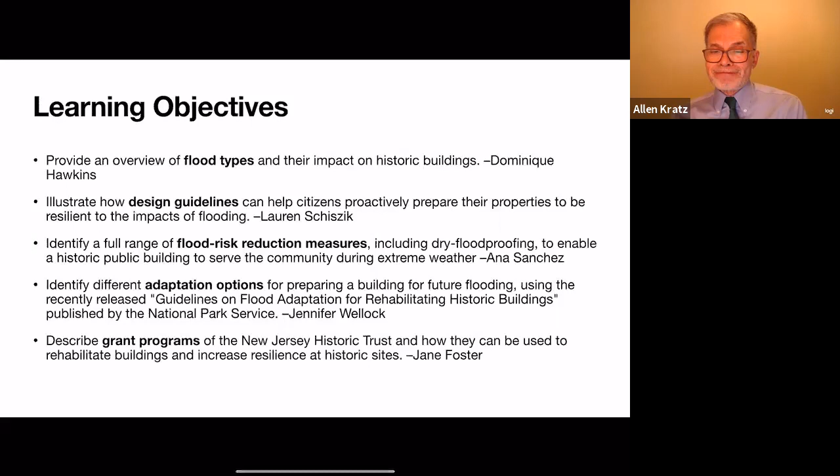Well, thank you. Doing an overview of flooding in 20 minutes or less is hard, so I'm just going to start talking. Next, please.

So historic cities, as I said, are located on water. This is the city of New Orleans. These are all the historic districts, representing over 47,000 properties in all of those shaded boxes. And that's the Mississippi River running through the city.

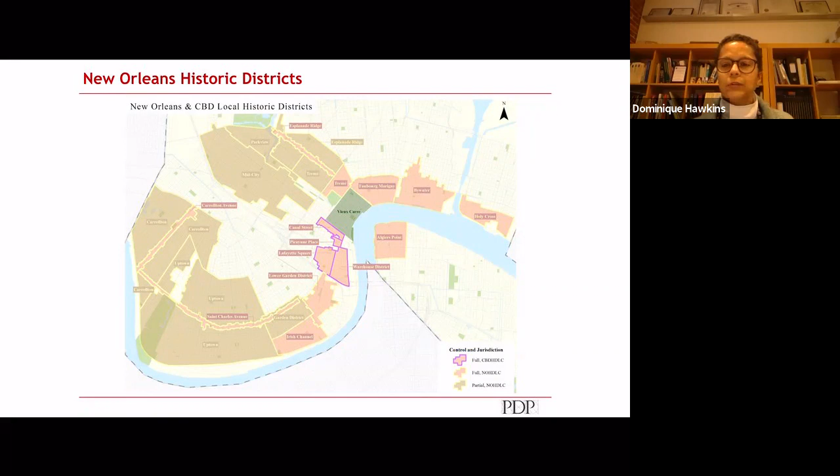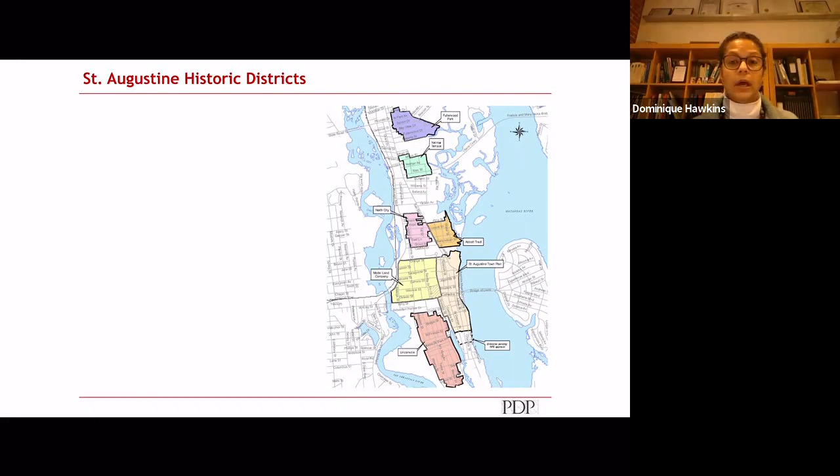This is St. Augustine, Florida, which has been recently hit by a few hurricanes. I'm currently working in St. Augustine on a flood mitigation project there for their historic districts. As you can see, they are literally surrounded by water.

Historic communities inland also face challenges. This is Exeter, New Hampshire. I took this photograph in 2016. By 2020, to manage the problems associated with water, they modified the waterway that ran through town.

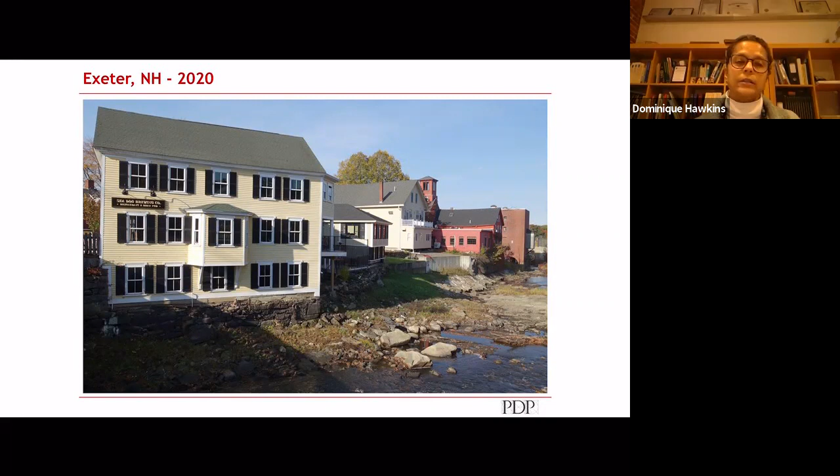Many of our associations with flooding are coastal, and these are the events that usually get the most attention—hurricanes coming into town, which also has an impact of wind.

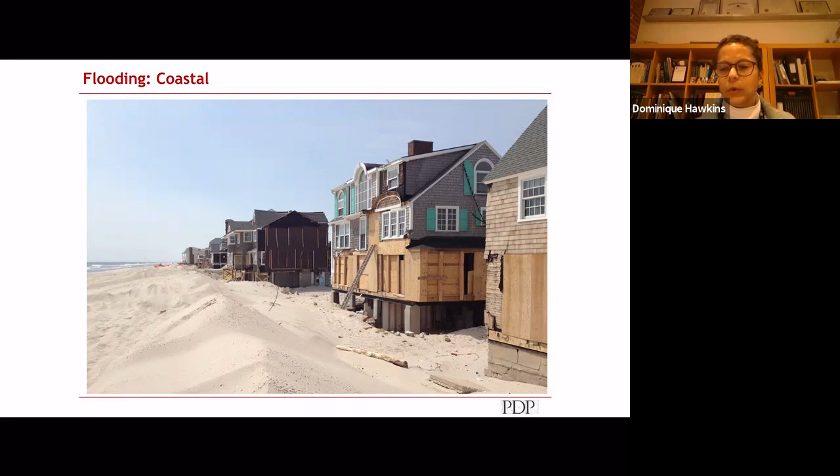But many people deal with flooding literally on a daily basis. Something called nuisance flooding or persistent flooding is when you have the high tides, the king tides associated with full moons.

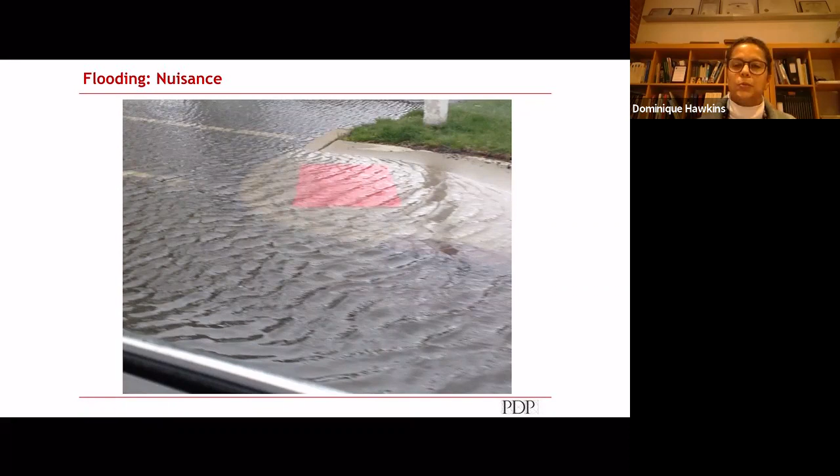People are dealing with water and having to adapt themselves to the fact that water is infiltrating their neighborhoods. In part, this is due to climate change, sea level rise, and subsidence, the lowering of the ground. When you take a high tide and add a major storm on top of it, you can get catastrophic events similar to Superstorm Sandy.

Flooding can actually occur from other sources. Ice can back up under a bridge overpass and cause flooding upstream. It's not just ice, it can also be debris. If you have a lot of debris in a river and a bridge with a lot of abutments or buttresses, that can hold back the debris and cause flooding behind it.

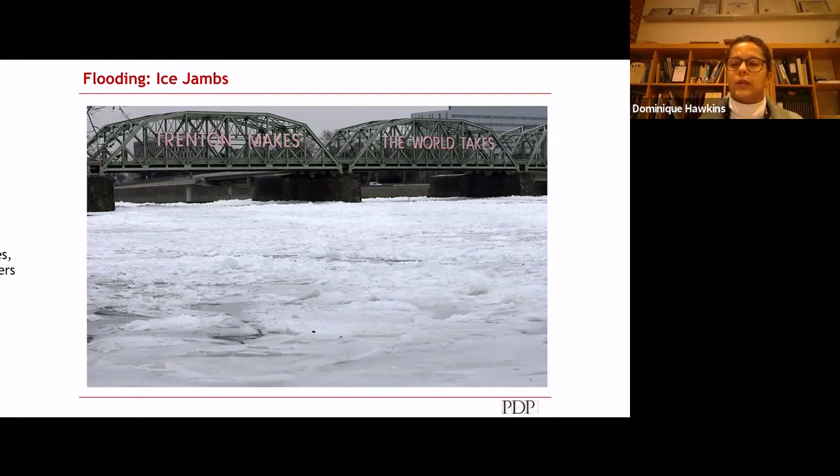You can also get inland flooding. A lake can fill up and cause flooding around its coast.

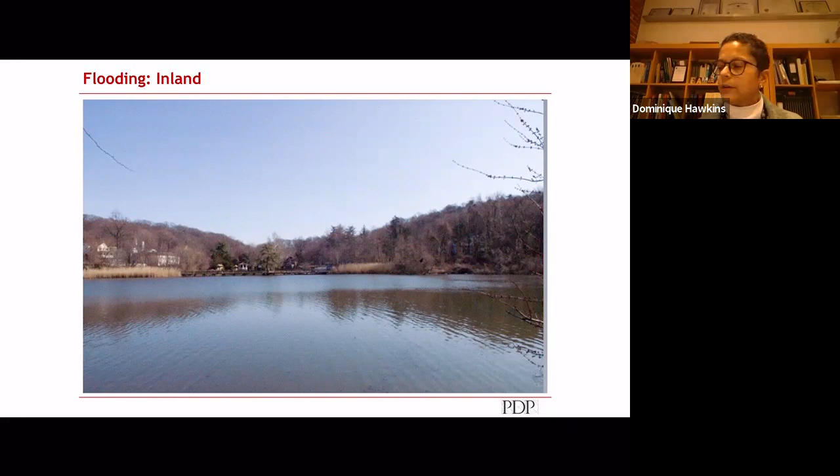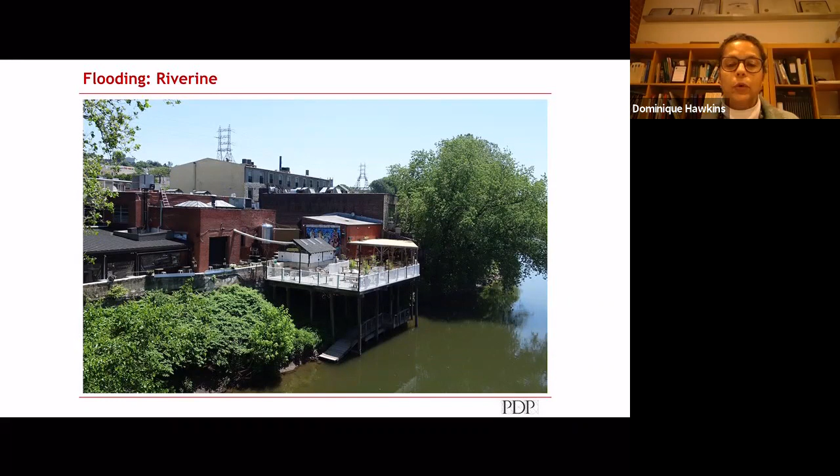Riverine flooding is where rivers rise. This is actually half a block from my office—the Manayunk Historic District, and I wrote a flood guide for the city of Philadelphia addressing riverine flooding. Take a look at that deck, off the back of a building that has been converted—a former mill building converted to a restaurant.

That's a flood. So this was—and look at that sunny sky. I literally sat at my desk and watched the gauges on the river, and I said, it's time for me to take another walk. And I went and took that photograph.

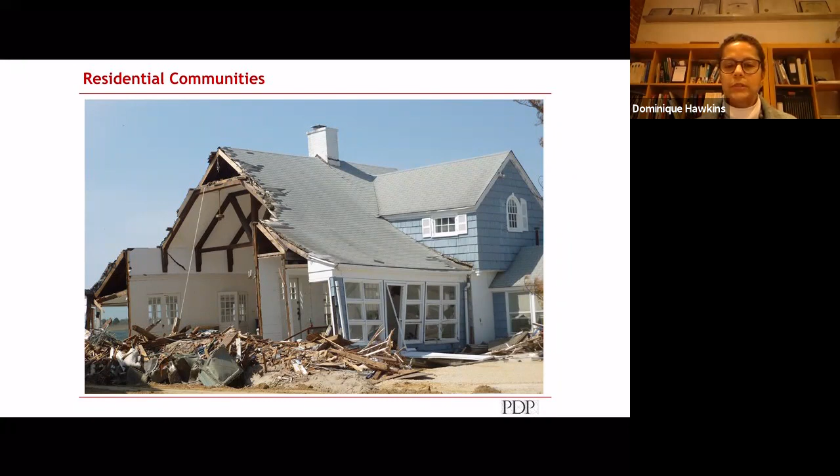Flooding can have catastrophic effects, particularly when mixed with storms. This is a result of Superstorm Sandy. As is this.

This is again back in Manayunk. It's also affecting commercial properties and small homes.

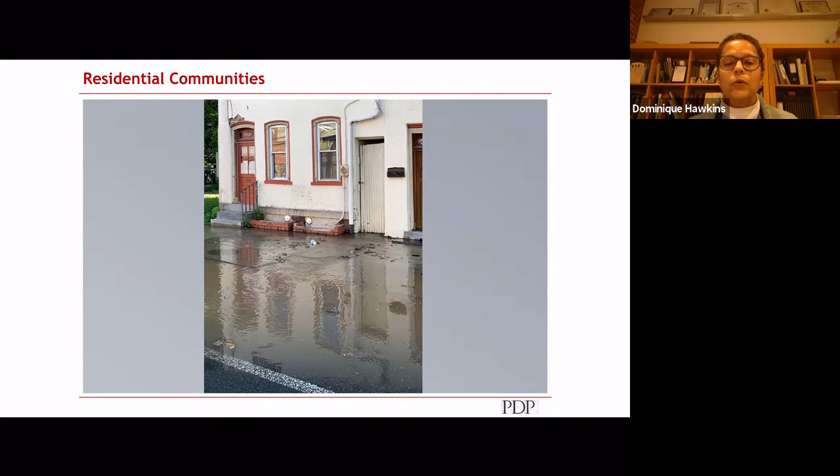Again, just that nuisance flooding—those high water signs are things that a lot of communities just have handy, because it's often a thing communities are dealing with, including places like Baltimore. This is Annapolis.

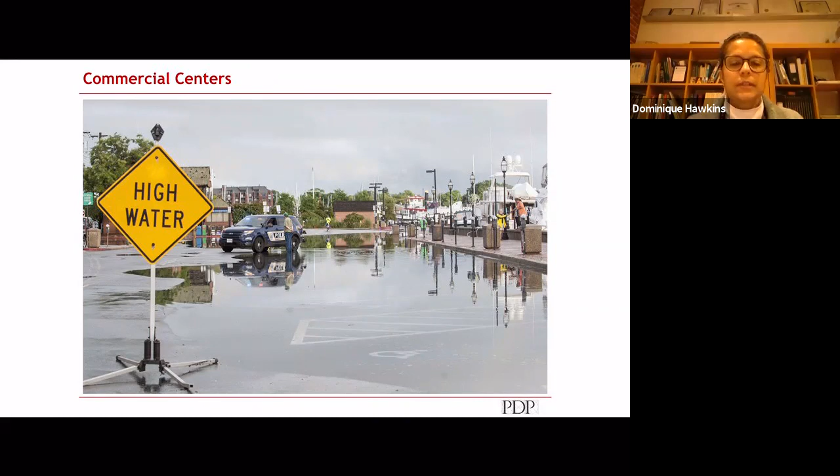In 2016 and 2018, there were two 1,000-year floods in Ellicott City, which ripped through their main street. Not only did it devastate Main Street, but it also caused loss of life. The term '1,000-year storm' means that based upon the historic record of past storm events, it was a storm of such intensity that it would be anticipated to happen only once every 1,000 years. They had two of these in two years in a row, and this is riverine flooding—a rising river.

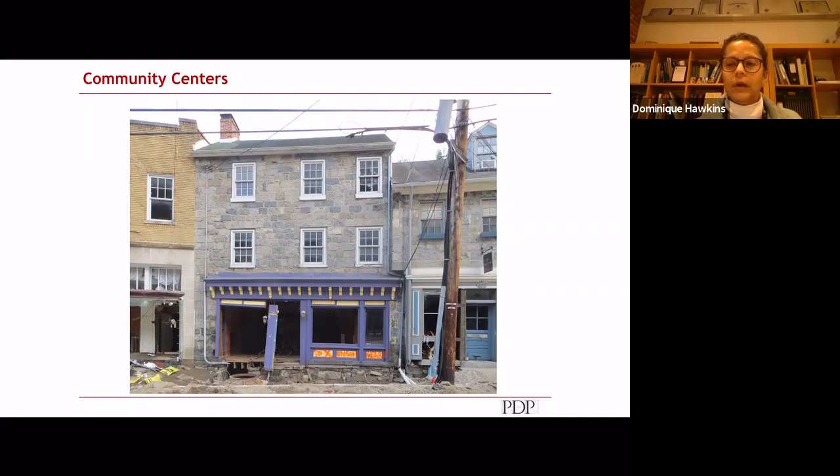It devastated downtown and caused huge economic upset in the town. It also resulted in clear destruction of buildings, and some hard choices about how to move forward.

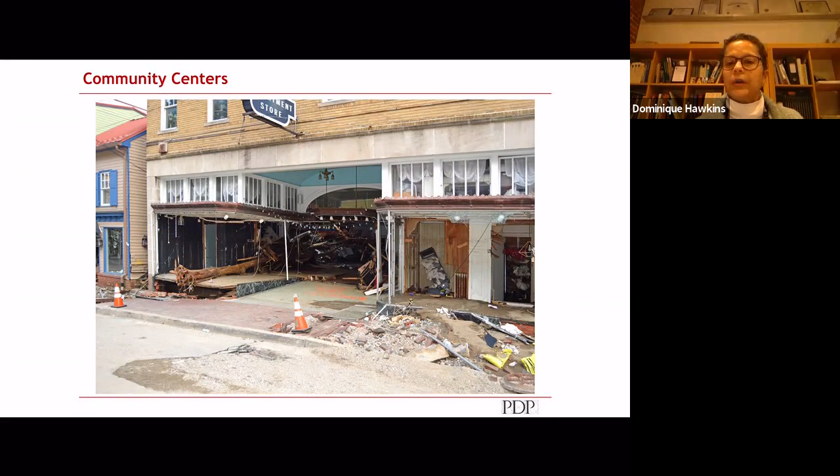One of the things that gets lost in terms of flooding is, particularly on the East Coast and along the shorelines, we think of flooding as a coastal problem. Flooding is actually a pervasive problem across this country.

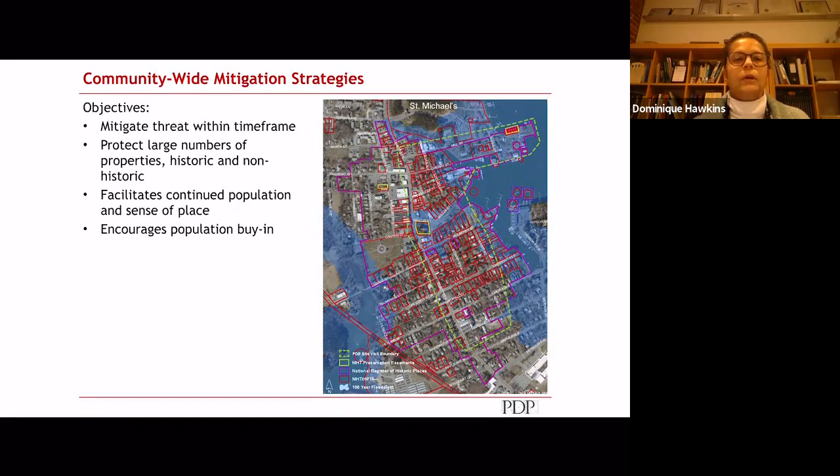Community-wide mitigation strategies fall into 5 categories. One of the most popular is shoreline and bank protection - basically something that keeps the water away at a defined shoreline. Stormwater systems are also a threat - if you can't get the stormwater off the streets or away from properties quick enough, that presents a threat. Community utilities and infrastructure are extraordinarily vulnerable to flooding, and if they are not well placed in a community, it can cause problems. If you physically can't get there, and your bridges or roads are inundated under water changes, that becomes an issue. There are also policy changes you can make to improve your flood resilience.

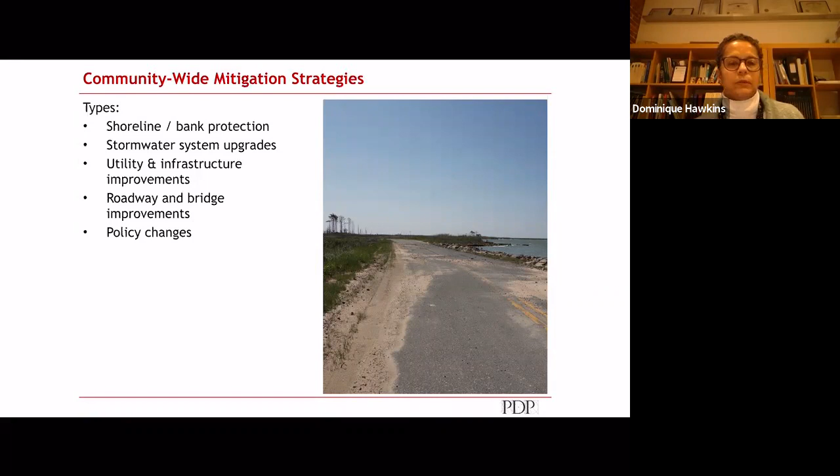Shoreline protection comes in two overall forms: structural versions and natural versions. The current thinking is natural versions are generally better, but I'll run through the variations of these.

Structural shoreline protection along the shore basically creates some sort of physical constructed barrier to keep the water away. You can do it along rivers, coasts, or bays, but it's usually some form of concrete or big heavy stones designed to physically keep the water away. When you go offshore, what you're really trying to do is break up the waves or the force of the water as it moves towards the shore - that's what breakwaters and jetties are.

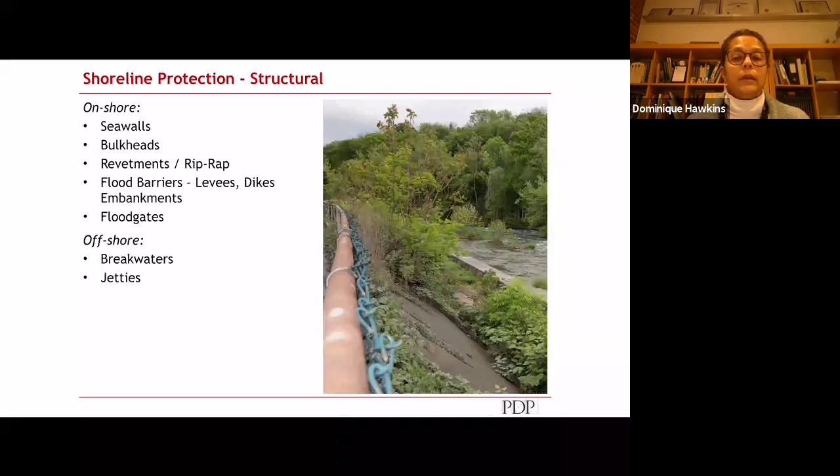Natural shoreline protection generally takes a lot more physical space, and can include reestablishing wetlands or floodplains, which generally means removing development out of those areas, including both buildings and paving. It also includes reestablishing dunes along shorelines and beach nourishment. In New Jersey, where you have literally mile-wide beaches, that actually helps protect those properties inland from flooding.

Stormwater management is both engineered and can be quasi-natural. Engineered options include how you manage water off of roadways - whether the water coming off roadways goes into a culvert and is absorbed into the ground, or whether it's taken to a facility that processes it and then dumps it into a river. This includes pumping stations and water storage and retention ponds. The concept is similar to LEED design, green building design, where you're trying to get as much water absorbed into the ground as possible and not diverting it into waterways.

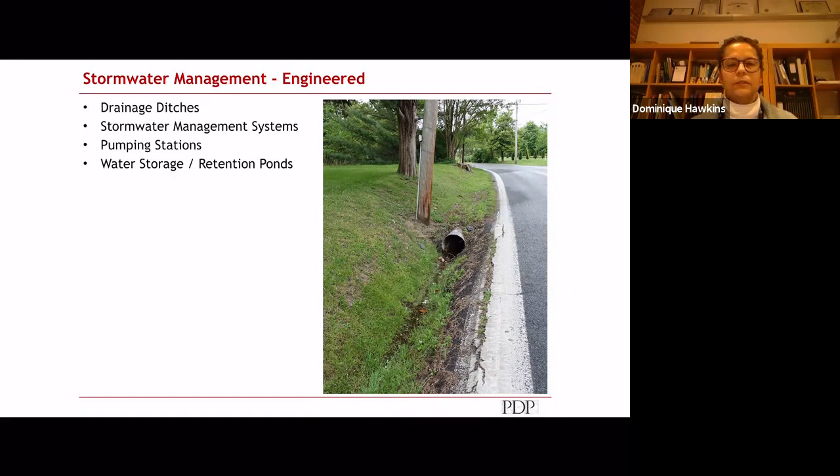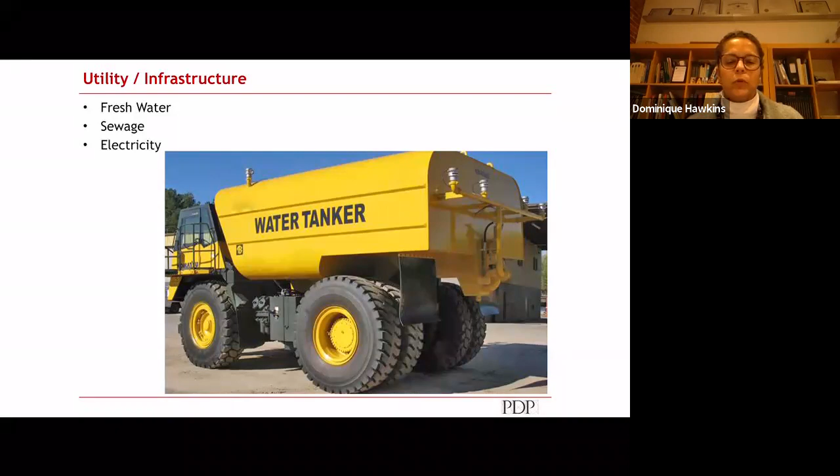As I mentioned, one of the key things is utilities and infrastructure. If you do not have fresh water, access to sewage, or electricity, it's really difficult to live in a place. As water tables are rising and things like wells are getting brackish and undrinkable, and septic systems are being overrun, or existing water treatment plants are vulnerable to flooding, it becomes more and more challenging for people to live in a place.

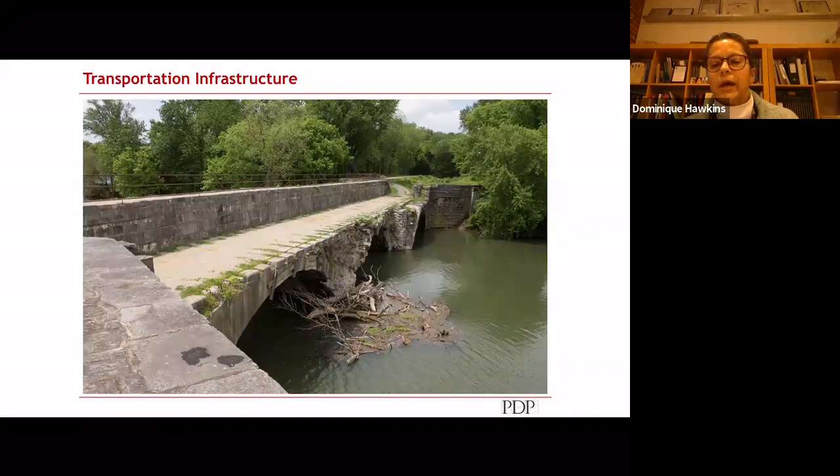And then there's getting there. So bridges, as I mentioned, can back up from debris. And getting to and from places that are a little more remote can become next to impossible.

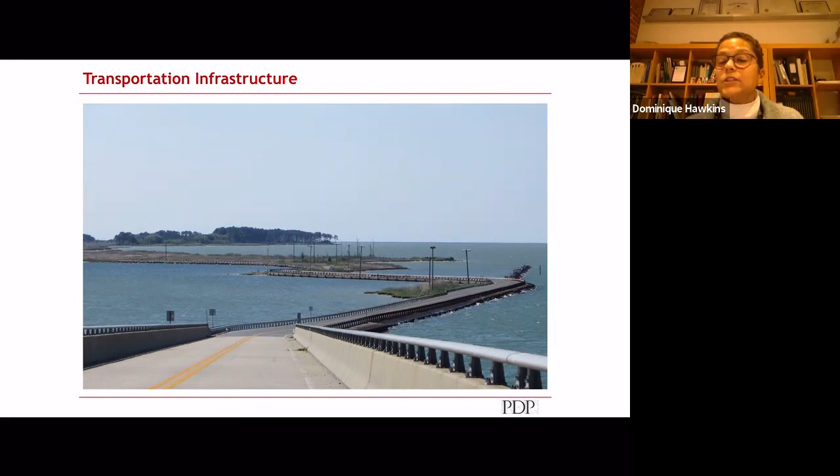So policy changes include ways to improve the building stock or the development of a community to improve its flood resilience. One of the things that many communities are confronting at this point is that they haven't been utilizing zoning to minimize the amount of impervious surface coverage or development in their communities. In many places, the revenues generated by a local municipality are based upon development.

If development is causing the funding of a community, there's an incentive to actually allow more development. Well, the reality is there's no place for the water to go when 81% of your surface is covered with paving or building.

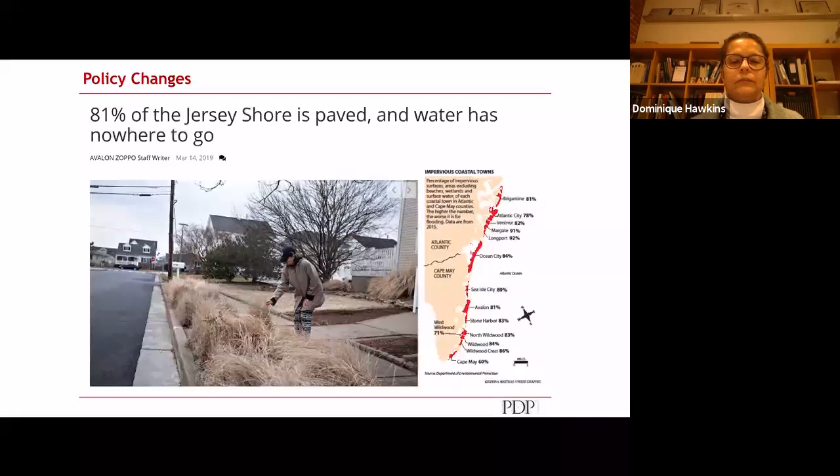One of the things that's gotten a lot of people mobilized to be concerned about flooding is that flood insurance rates are actually going through the roof. The reason they're going through the roof is the flood insurance program is supposed to be independently or self-funded, meaning you pay a premium into a pool of money, and from that pool of money, gathered from across the country, it's then distributed when there's an event.

But if you think about the recent past, between Katrina, Harvey, Sandy, Michael, Irma, everybody, depending on where they live, has a different version of this truth. The federal government has been paying out more and more in flood insurance than they have been getting in premiums.

As a result, there was an act passed in 2012 that mandated that the rate of flood insurance actually go up to reflect the cost of the premium. So everyone's insurance is going up and everyone's kind of panicking at this point regarding flood insurance and are looking to improve their personal properties.

In looking at what you can do at a building or property level, similar to a municipal level, there are certain landscape improvements you can do. These landscape improvements are generally geared towards minimizing the water that is put into a stormwater system and getting as much water to get absorbed into the ground as possible.

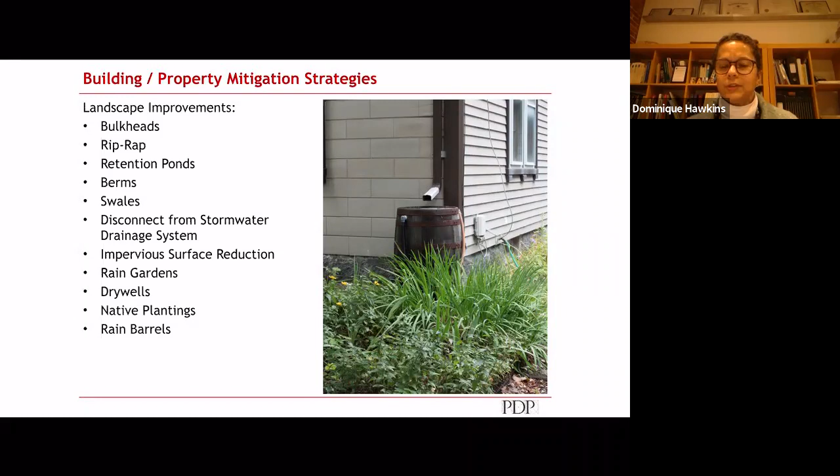You can also maintain your building. A poorly maintained building is not going to resist a flood well. Keeping a building well maintained will increase its ability to withstand flood, both in terms of the rising water as well as force of water if that becomes an issue.

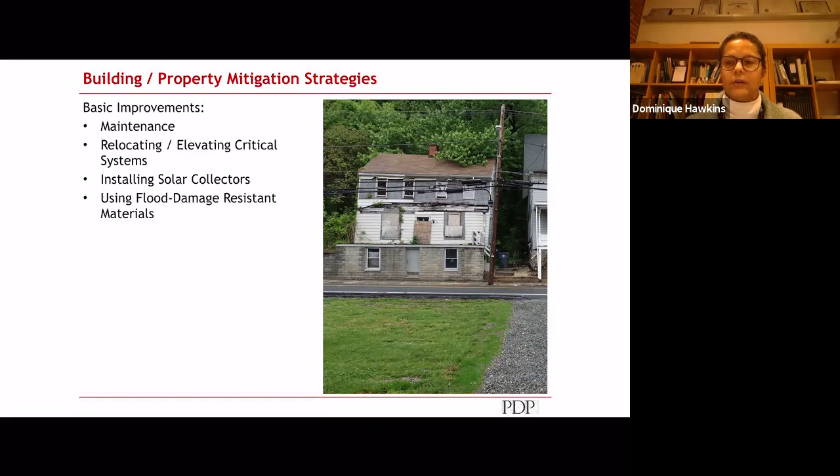You can also take your critical systems and equipment—your heaters, your generators, your water heaters, et cetera—and raise them up and above the floodplain. And you can look into using secondary power sources, be it a solar collector or a generator, so that you can recover faster from a flood.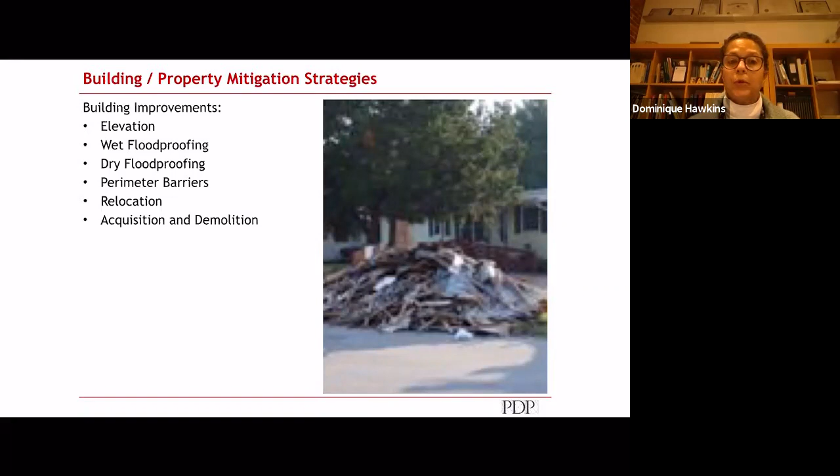There are also building improvements that you can do, which generally require working with an architect or a design professional. These include elevation, wet flood proofing, dry flood proofing—which we'll hear more about later—perimeter barriers, relocation, and acquisition and demolition.

So what is elevation? It is literally picking a building up off the ground and raising it to a higher level. The process includes disconnecting all building systems—wherever the electrical or the sewage connects to the building, you disconnect those lines. Put beams underneath, jack those beams up with the cribbing, as you see, and then set the house at or build a foundation up to the new height that's desired, drop the building down on it, and then reconnect all your systems. So that's the essence architecturally of what building elevation means.

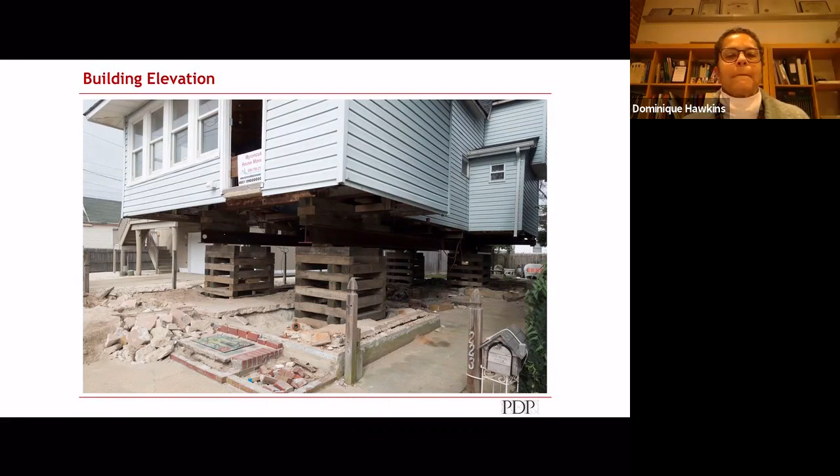So this is an example of wet flood proofing. The picture on the right-hand side is a house in Fells Point in Baltimore, and the back of the house was largely damaged. I'll let Lauren speak more to this, but since it's my picture, I get to speak first. So the bottom floor of the house, the lower level, is in the floodplain. If you look at the image to the top left, the two small basement windows are actually blacked out from the back and you can't really tell. The basement has been infilled with gravel, which is a solution you can use to keep the foundation walls from collapsing. The first floor is used for storage, and in the back of the building, which is the middle photograph, you can access a garage, which is the first floor. The upper two floors are the living space.

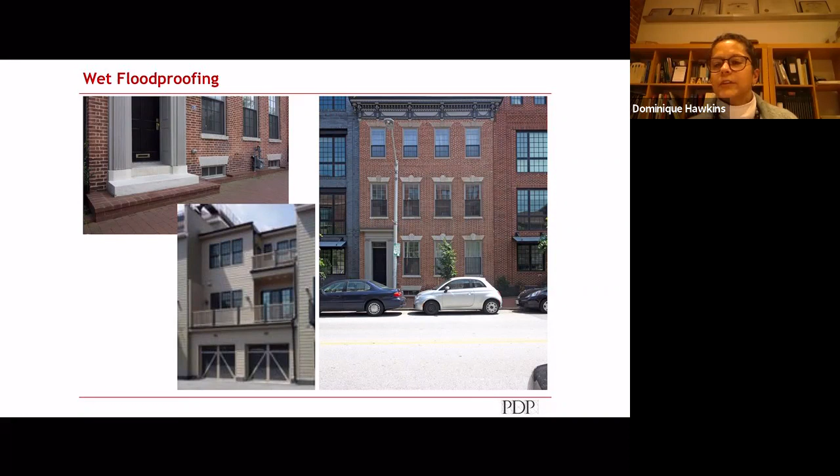Dry flood proofing is literally keeping the water out, and we're going to see more of this at the library project. In this Baltimore example, the channels on the left are installed to accept the panels on the right. In the event of a flood, those panels are dropped into the channels, and in essence you're trying to keep the water out through a barrier.

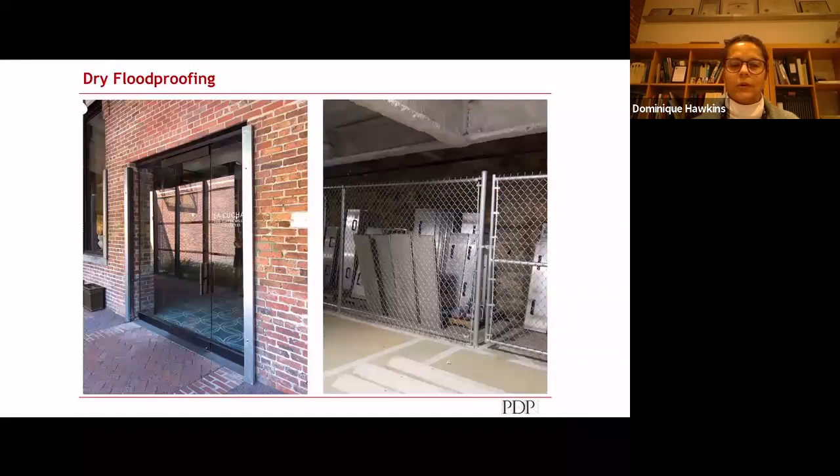This is an example from Manayunk. On the left-hand side and the right, it's the same opening - pre-flood and during flood. This is the same deck I showed you on the other side. What typically happens is there's seepage under the panels, so you have to have a way of getting that water out. This happens to be an exterior location, so it's not that significant.

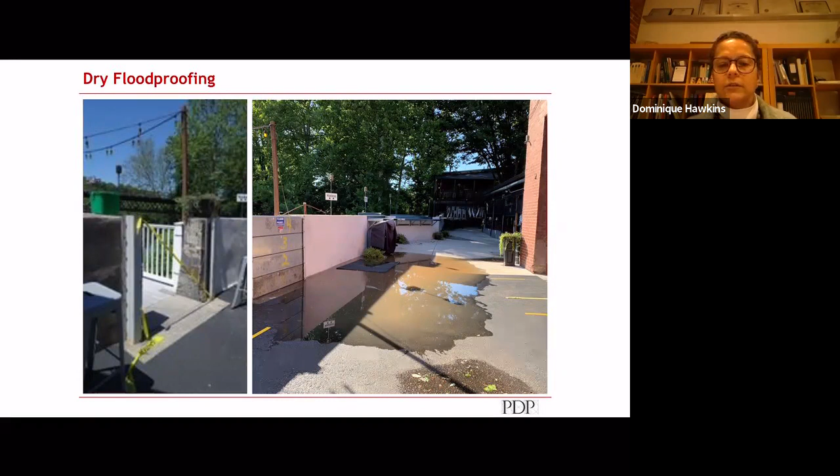Perimeter barriers is another alternative. This is a wall again with similar kinds of channels built in. When the flood water rises, somebody has to physically be there to drop the panels in, and if they're not, then that's a problem. This location is actually on a river at the Jones Falls neighborhood of Baltimore, and that river tends to rise very quickly, so making sure somebody is there is a problem.

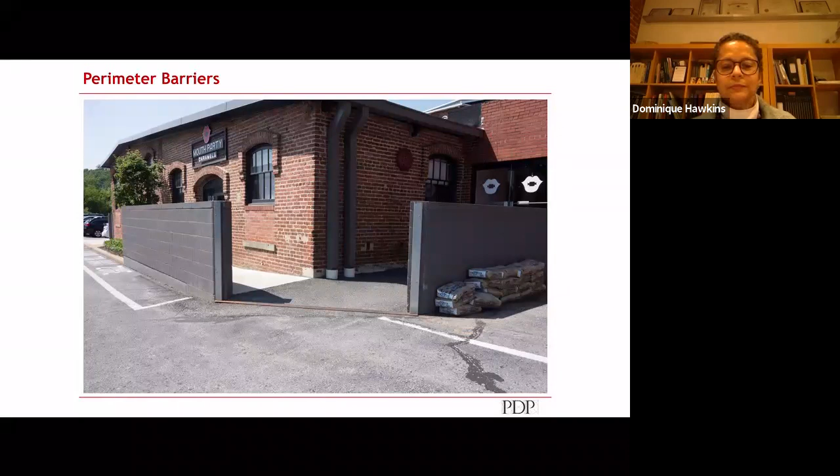Building relocation is another option. The Park Service has had, as far as I remember, standards established for relocating buildings in terms of context, et cetera. In terms of what it physically means to relocate a building, it's very similar to elevating a building - just picking it up off the ground and setting it somewhere else. The challenge is how you get from point A to point B with the building, but it's physically doable. You might run into electric lines, bridges, overpasses, and all the problems you have to negotiate to move a building.

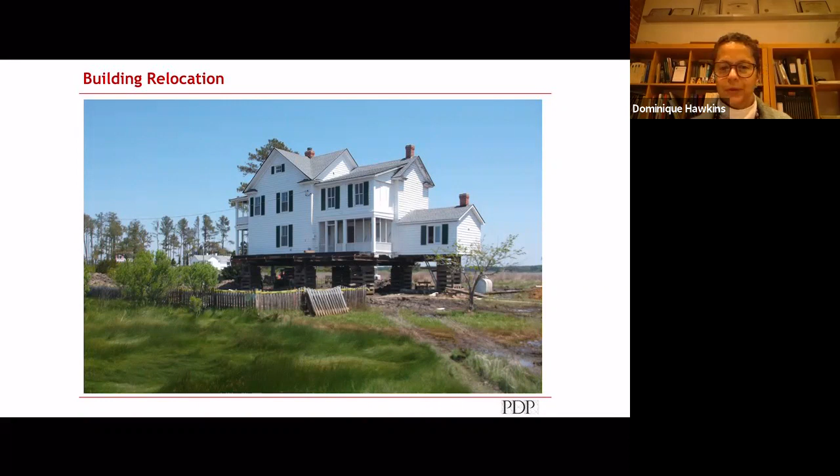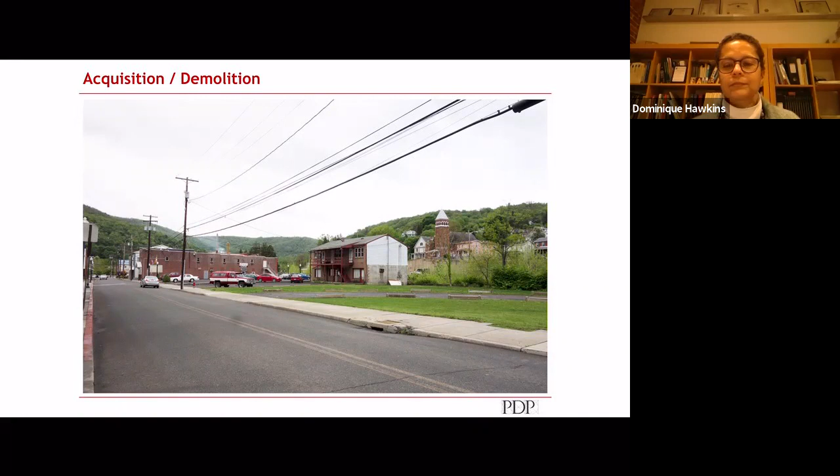In looking at all of this, I've really focused on buildings. What I haven't focused on is landscape or archaeology. One thing to keep in mind is that brackish water, the somewhat salty water coming in, is impacting landscape and things like trees, but also farming, et cetera. So people are having to relocate because they can no longer sustain themselves the same way in the same places. Archaeologically, it's horrific because everything from cemeteries to archaeological remains are literally being exposed.

I don't know why some of these images aren't coming up.

In looking at how we start to adapt to flood, one of the things we tend to do is adapt our behavior. So we will know to drive a different way if the road is underwater. We won't park in the parking lot if it gets flooded.

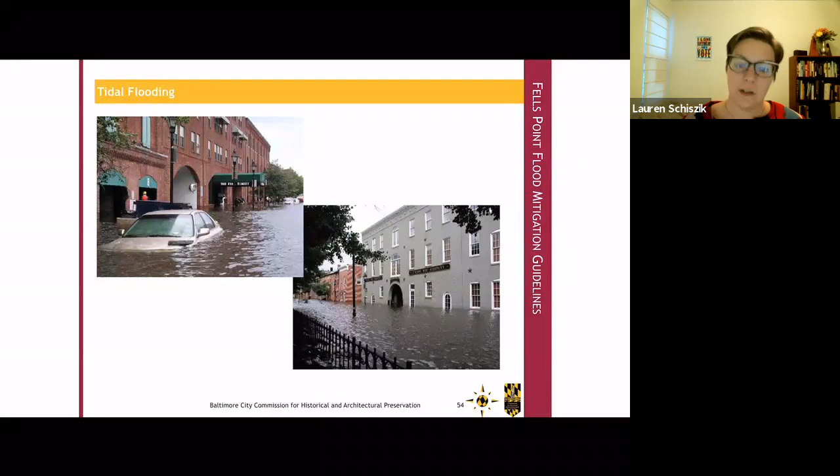Baltimore City is no stranger to flooding, whether it's tidal flooding in Baltimore's Inner Harbor from Hurricane Isabel in 2003, or from its rivers and waterways, like along the Jones Falls in 2018. Dominique mentioned the huge flood that destroyed downtown Ellicott City. That same rainstorm impacted our Jones Falls River Valley.

Two rivers meet immediately north of this location at Meadow Mill, and the water flow can change from a trickle to a dangerous surge very quickly. In fact, on this day in 2018, the water levels rose in half an hour to the point where people were stranded in their cars in the parking lot. Luckily, there was no loss of life. Interestingly, these mills were built along these waterways for the water power the rivers provided, so what was once the source of energy can now be a life and safety liability.

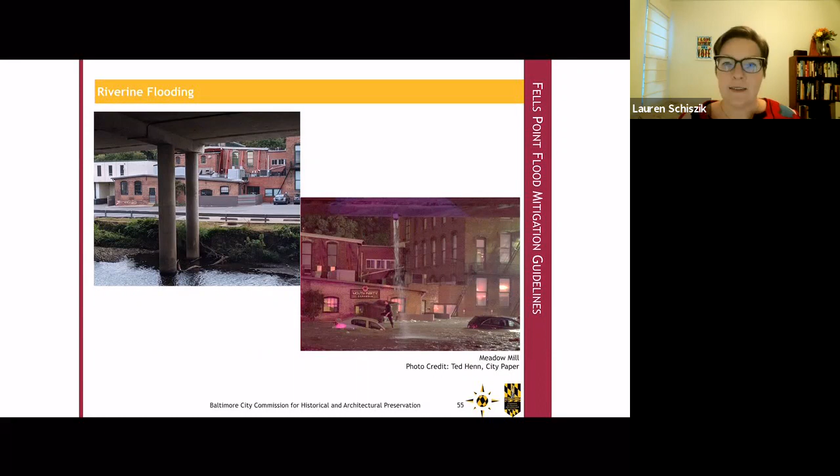Another type of flooding that Baltimore regularly faces is urban flooding, which is not as recognized by FEMA but is still a problem. It's caused by high volumes of rain in short periods of time that overwhelm the stormwater infrastructure, and due to climate change this weather pattern is becoming much more common in our region. This issue is exacerbated by large amounts of impervious paving—there's literally nowhere for the water to go, so it pools in the lowest place it can find.

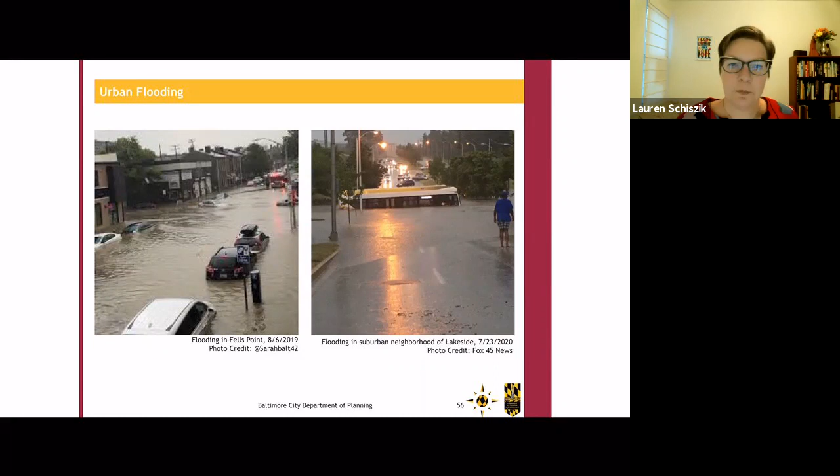So how are we addressing these issues? In 2013, the Department of Planning, where I work, produced the Disaster Preparedness and Planning Project, which we call DP3, a comprehensive approach to address mitigation of existing hazards and planning for climate adaptation regarding sea level rise, increased precipitation, flooding, and other climate change impacts. This plan was then updated in 2018.

Also of note is that Baltimore City has participated for over 40 years in the National Flood Insurance Program, NFIP, which offers federally subsidized flood insurance. Baltimore also participates in NFIP's Community Rating System, CRS, and has a rating of 5, which equates to a 25% discount in flood insurance for property owners. So it's a pretty significant amount.

Next slide, please. We were able to achieve that CRS rating and make folks eligible for those discounts in part because Baltimore City has adopted floodplain regulations that are stronger than FEMA's. FEMA requires cities to regulate the areas that have a 1% annual chance of flooding. It's previously been called, and still can be referred to as, the 100-year floodplain. Folks are getting away from that terminology because it's flooding more than every 100 years. So what we really want to focus on is what is the annual chance of flooding? And it's a 1% chance every year.

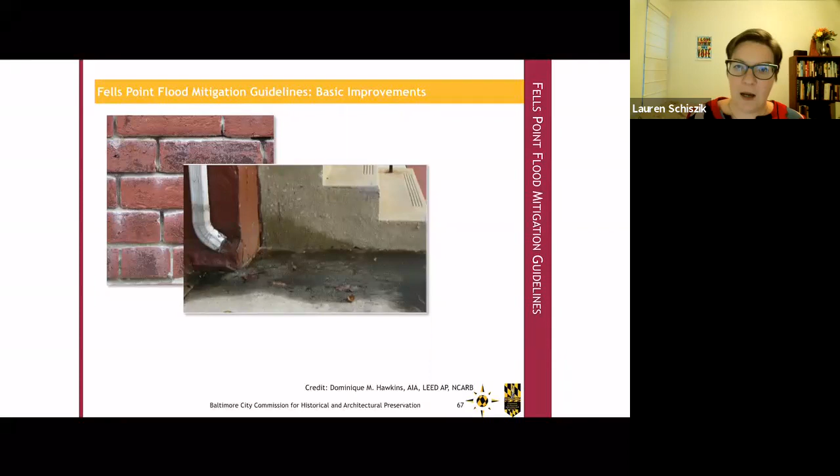Or just making sure that your drains and downspouts are well maintained, and clearing debris — some really basic building maintenance issues.

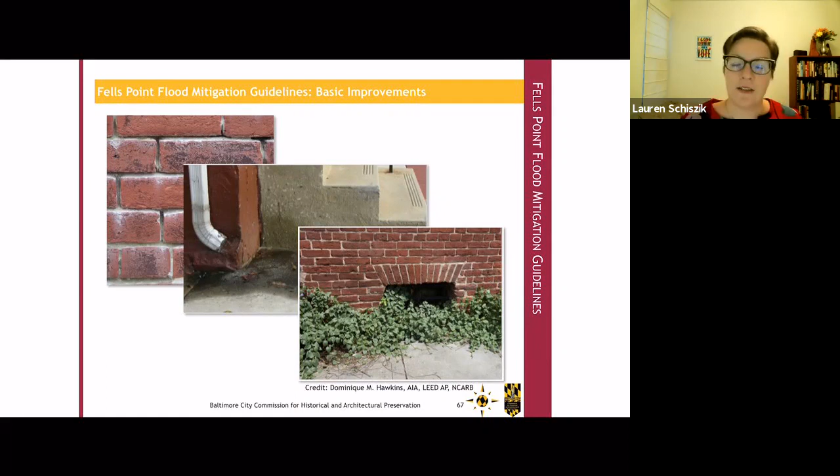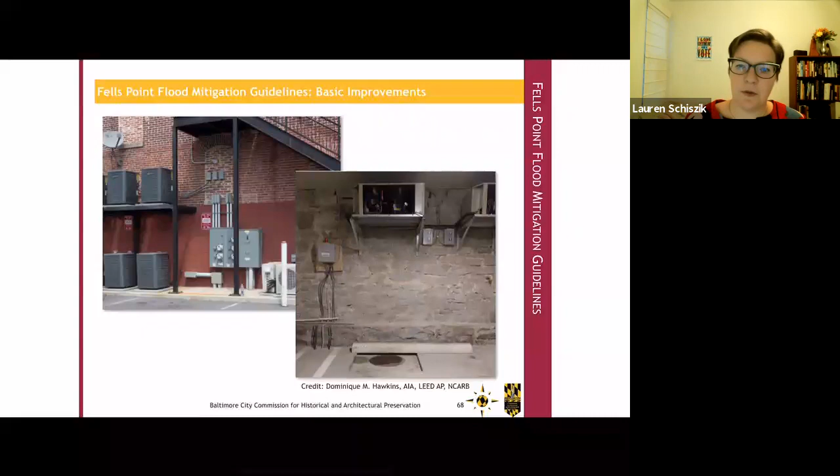Other examples of basic improvements, which while more costly, don't involve structural changes to achieve hazard mitigation, could include relocation of critical systems and equipment, as well as elevation of some of these sources and installing secondary power sources.

But when flood mitigation involves building alterations, things get a lot more complicated and expensive. These types of alterations are typically triggered by substantial improvements to a property, and they need to not only meet our local regulatory historic preservation regs, but also comply with building code and floodplain regs, which in Baltimore City are stronger than FEMA's.

It's in this section that some of the hard realities of our near future with climate change really hit home. For example, the guidelines confront the fact that a homeowner may need to abandon use of the basement, as Dominique mentioned, and that the first floor may need to be reserved only for entry, garage, and storage. This is an example of wet flood proofing, a flood mitigation measure that complies with Baltimore's floodplain management regs for residential, commercial, and institutional buildings.

Wet flood proofing is really a 'living with water' viewpoint, and in a lot of ways it turns historic preservation on its head. In some places we may have to functionally abandon parts of a structure and design the building to be able to take on water regularly. It's really sobering stuff.

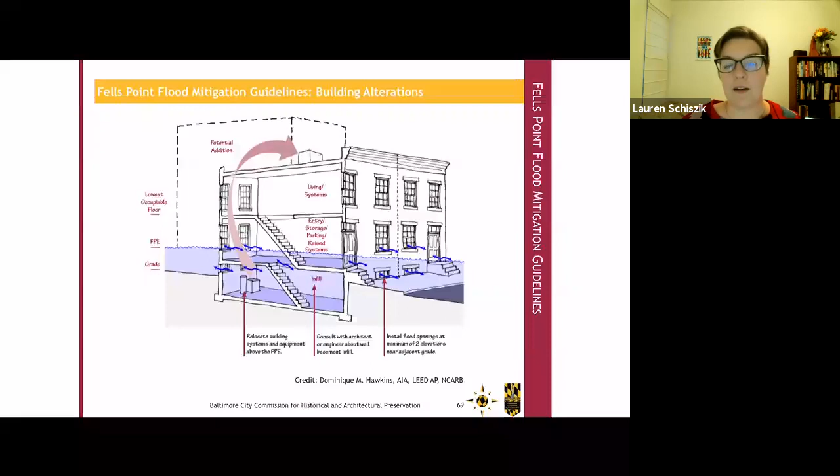You can see in this drawing a potential rear addition, built to the rear of the lot, maybe even a floor higher than the original historic structure, as long as it's set back enough from the street that it's not visible from the streetscape. What are ways we can have these buildings continue to serve in the future, even in a world where they're going to be dealing with water regularly?

As Dominique already mentioned — and I'm glad she did, because it lets me save time — this is an excellent example of wet flood proofing in Fells Point, where the basement was infilled. The first floor is only used for storage and parking, and the living spaces and systems are on the second and third floors.

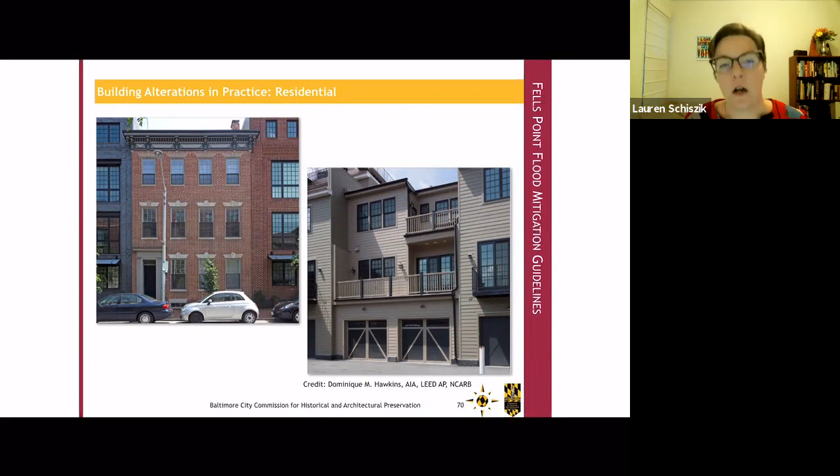And as Dominique also showed, this is the alternative mitigation measure of dry flood proofing, of having the perimeter walls and having the gates. Dry flood proofing does not comply with Baltimore's floodplain regulations for residential properties, but it can be used for commercial and industrial properties.

A barrier like this one installed at Meadow Mill can work very well in preventing water from coming in. However, if you remember that photo we saw before, these only work if there's advance notice about a major storm, and someone has to be on site to install the barriers correctly, not upside down or backwards, which are things that happen when you're stressed out and working fast. I know I wouldn't trust myself to try to install flood barriers in a panic.

So I'm really excited to learn from our next speaker about other practices that might be more effective for dry flood proofing.

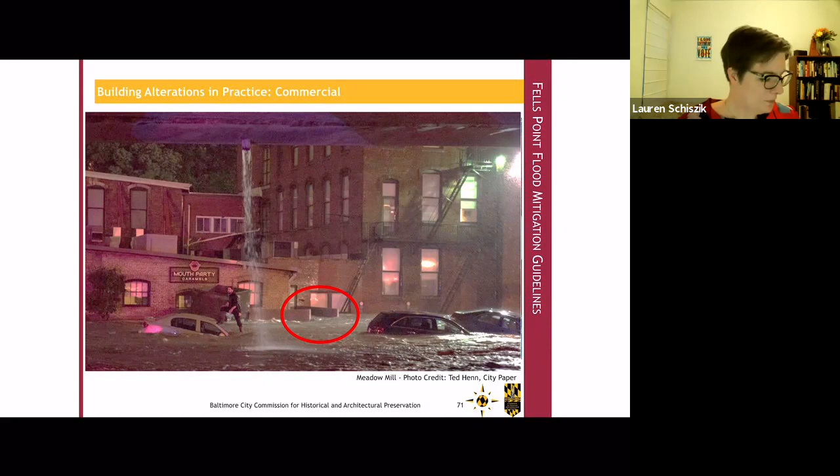But this is sort of an outlier, because the majority of the folks that we are going to be serving are going to be homeowners.

So we learned some lessons in this process, weighing historic preservation and life safety. The historic resources matter, but people matter more. Our primary goal is to help people live in their homes for as long as they can before we need to start talking about abandonment. These are difficult conversations to have, but they're really important. So we will continue to work as a team with our planners, our floodplain managers, and our communities to move forward and learn to live with water as well as we can.

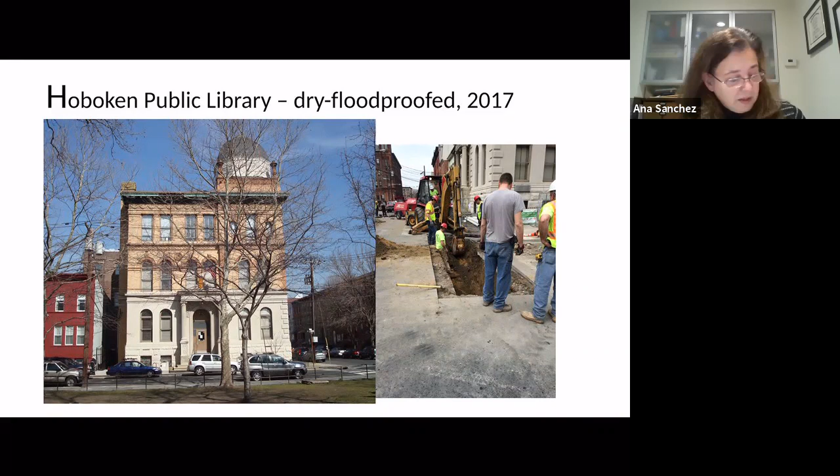Hoboken is at the edge of the Hudson River, and we learned the hard way from Irene, from Sandy, and even from increasing and frequent rains that we needed to keep our building dry while balancing two important objectives: historic preservation and flood protection. So here is a very quick alphabet of adaptation.

Well, actually, a brief segue: the basement of the library was going to be renovated just as Sandy hit. Sandy offered an opportunity for us to understand what the space needed to be and for us to change course rather quickly.

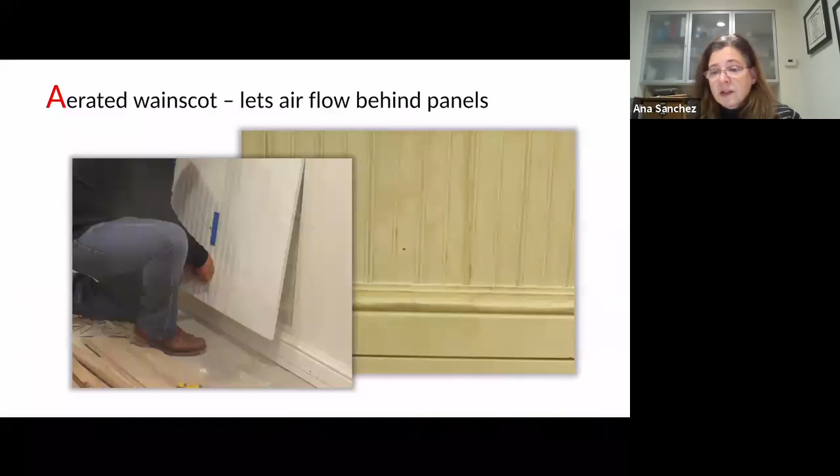So next is A, for an aerated wainscot that lets air flow behind the panels and lets us watch that the building stays dry.

Backflow preventers keep rainwater from backing into the building's interior waste line. Hoboken has a combined sanitary and storm system. Check valves mitigate and provide similar protection, since the library was built in a part of town that used to be a marsh.

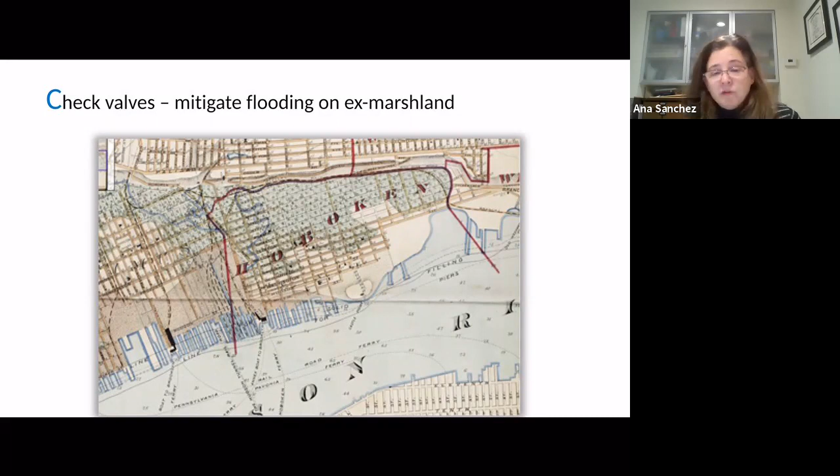The downspouts are diverted during storms in order to relieve water that could go through the building. It now goes on the outside.

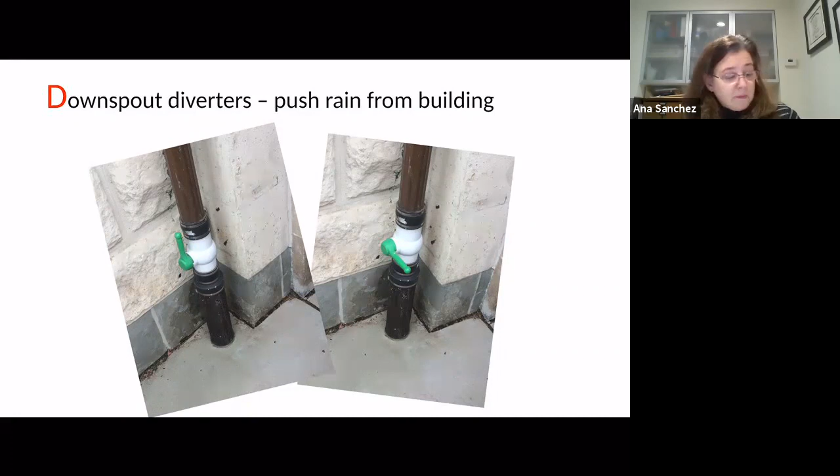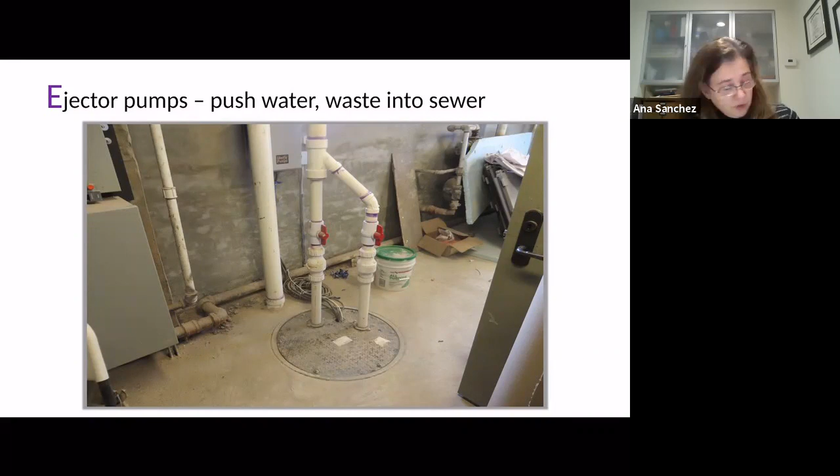We installed ejector pumps to push water into the new lateral lines we added for better drainage into the city's sewer system. We also installed floodgates at all of the below-grade entrances to the space.

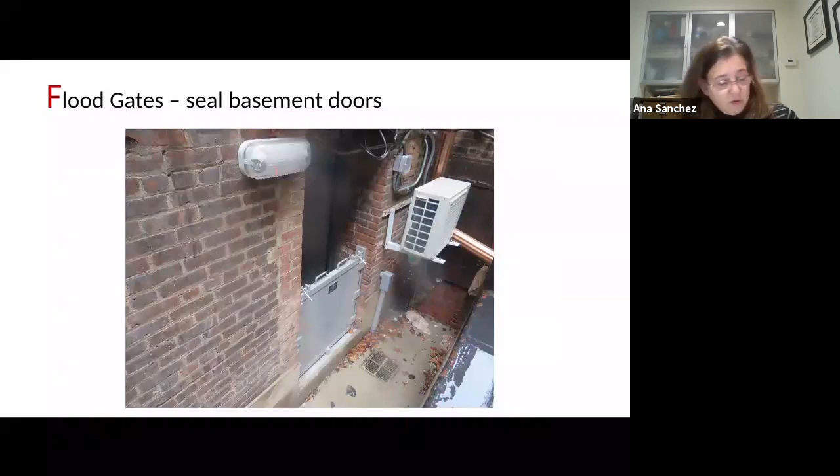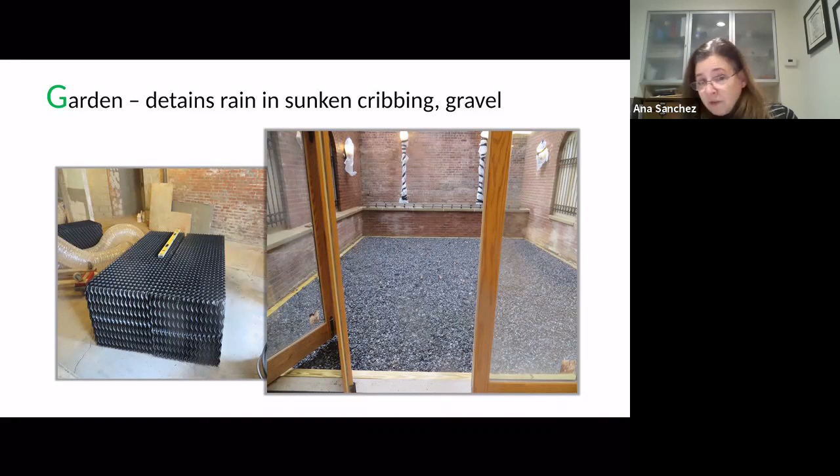The next slide is G, for garden. A concrete courtyard was converted into a garden that temporarily holds rainwater in two feet of gravel buried beneath the permeable top layer of artificial grass. As a bonus, it has become one of the favorite spaces within the library.

High above the flood level, we installed generators to power the ejector pumps and to turn the library into a community refuge center during heavy rain, snow, or extreme heat, if these events knock out the external electricity.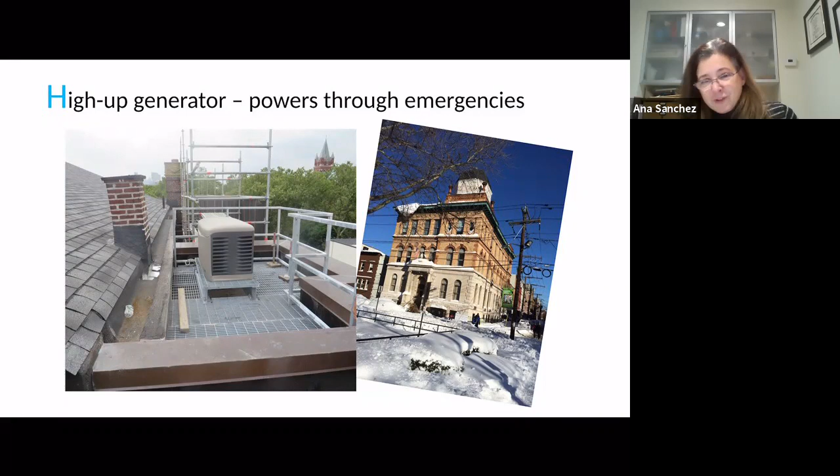I will now rush to the end of the alphabet, which is X for Xypex. Xypex is a liquid solution used to waterproof the basement walls and parts of the floor. Essentially, we turned the basement into a bathtub that kept water out, and by being able to dry-proof and protect our basement, we expanded the usable space of the library by 33%.

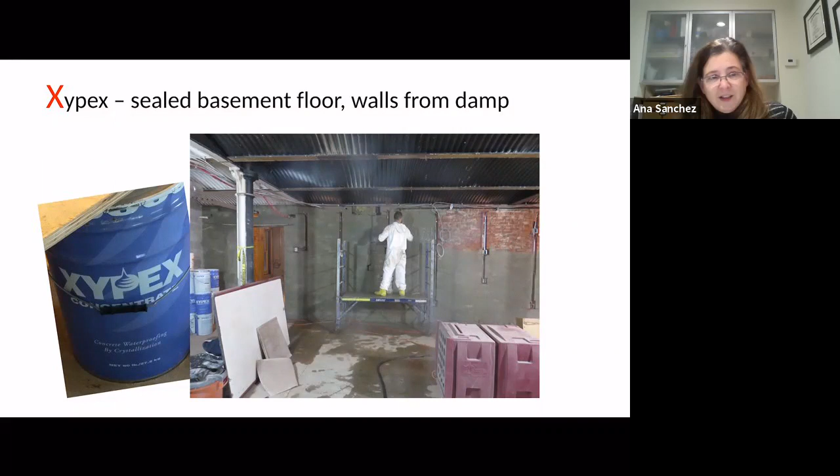So our experience here is: Y is a resounding yes. Historic buildings can be flood-proofed while they retain their historic authenticity.

And finally, Z highlights the reality: that many historic structures, as our previous speakers have talked about, lie within flood zones and near rivers, waterways, coasts. Our flood-prone library received $2 million in federal, state, county, and city funding that secured our National Register building while accommodating both historic preservation and resilience against rising water.

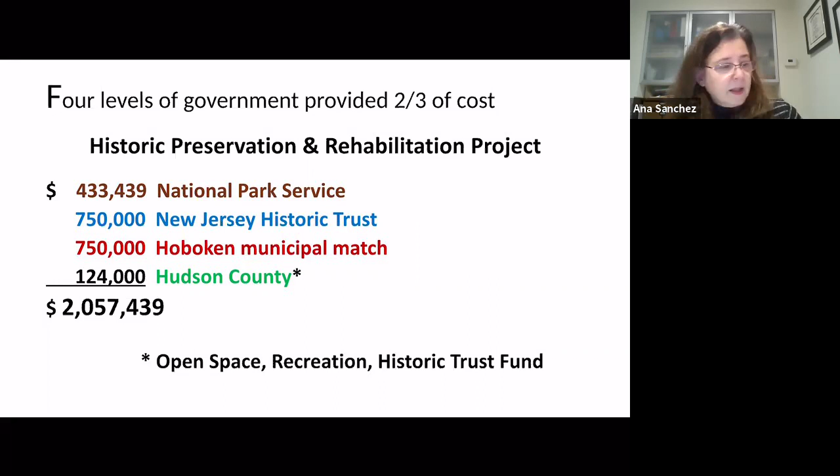So during this project, we learned a lot about the ABCs of giving our historic building a future.

Thanks, Ana. In a year in which our hurricanes went into the second alphabet, it's nice to know that the ABCs in Hoboken are holding the library in good stead against rising damp and all sorts of other water intrusion.

This is a project that came to the attention of the National Park Service, and we're going to hear now from Jennifer Wellock, who's been instrumental in helping update the guidelines on flood adaptation for rehabilitating historic buildings, and the library is going to be one of the examples in that. So Jennifer, I'd like to hear from you with a national perspective.

All right, thank you very much. It's been interesting to see all your projects. I remember them when they first came through the office, and it's fun to see them now again.

I'm one of the authors of the Guidelines on Flood Adaptation for Rehabilitating Historic Buildings. This was released by the Park Service last year, but we're putting out new illustrated guidelines. Ana knows one of her buildings, the library, is in there, but so too is Fells Point, and so too are the Jersey buildings. So you'll all see friendly faces when you open it up.

Why the Park Service? Why did we do guidelines? Well, you can see why, because we're a steward of cultural resources ourselves, plus the National Historic Preservation Act directs us to develop guidelines and technical information on the preservation of historic properties.

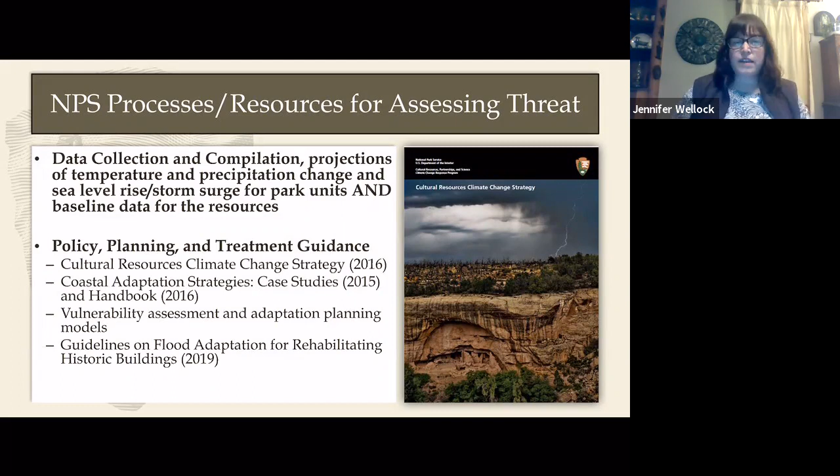So how did we get here? My office is the State, Tribal, Local Plans and Grants Division, and we fund the SHPOs and the THPOs - the State Historic Preservation Offices and the Tribal Historic Preservation Offices. We also run a number of grant programs: Save America's Treasures, Tribal Heritage Grants, African American Civil Rights Grants. Occasionally when there's a disaster, Congress appropriates money from the Historic Preservation Fund, which we manage, and sends it out to the states that have been damaged. That happened way back through the Iowa floods.

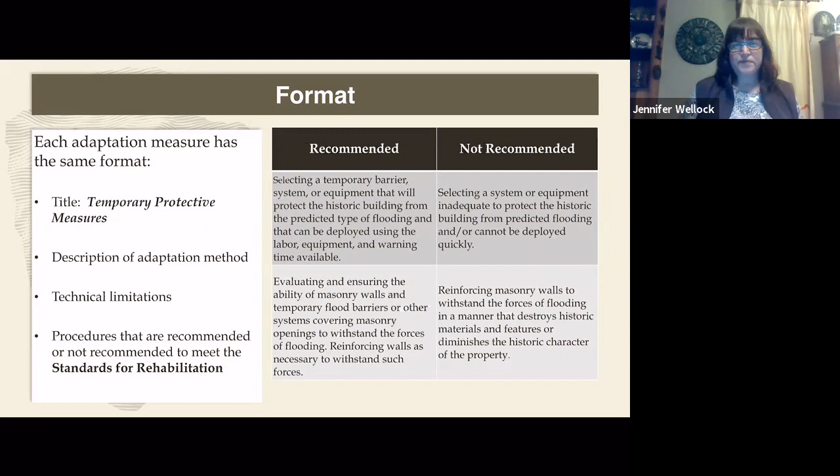Before you do anything, we want to make sure you plan and assess for the flood reduction you're doing. We want you to take time to document the current condition. Maintenance is super important. First, let's make sure the gutters are clean. Let's try to do the low hanging fruit first before we do an adaptation.

And you want to look at the vulnerabilities. This is about trying not to have a failure of imagination, right? Think about anything that could come your way. And think about also the existing capacity for resilience in the building.

Some of the buildings down south were built with the idea that they might flood. Maybe they're raised on piers to allow humidity to go through the building, let airflow. Over time we sometimes tighten up buildings because they're cold, particularly in the north. So maybe look to see if there's any place we can get back some airflow that might help us in an event to dry out quicker. So we're looking for inherent characteristics that might help us.

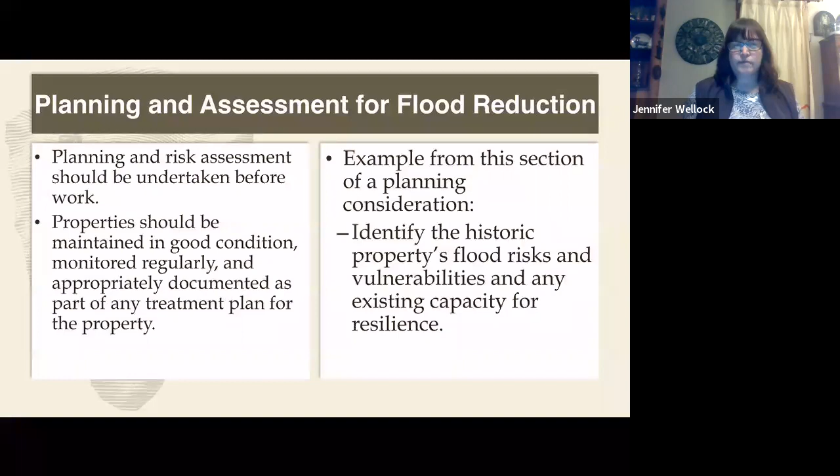I'm not going to talk about each of these because my colleagues here have done a great job. I just want you to know that these are the topics that are covered. As I said, there's going to be an illustrated guidelines with graphics that will go with each section. We also have, I believe, three to four case studies of properties that had to combine treatments. You can't just do one thing.

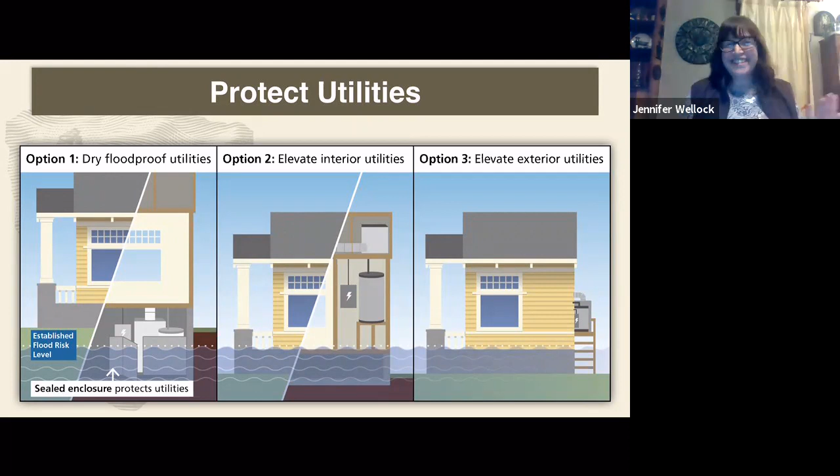I think utilities is the one almost everybody will have to address regardless of their treatment if they've had a storm, whether it's pulling out the HVAC and putting in new, deciding if it's at the end of its life anyway and just replacing it with a new material or going to a different system. So I'm going to fly through these. If anybody has more questions, we'll get to it at the end. Let's just go fast. Next slide.

Dry flood proofing. Next one.

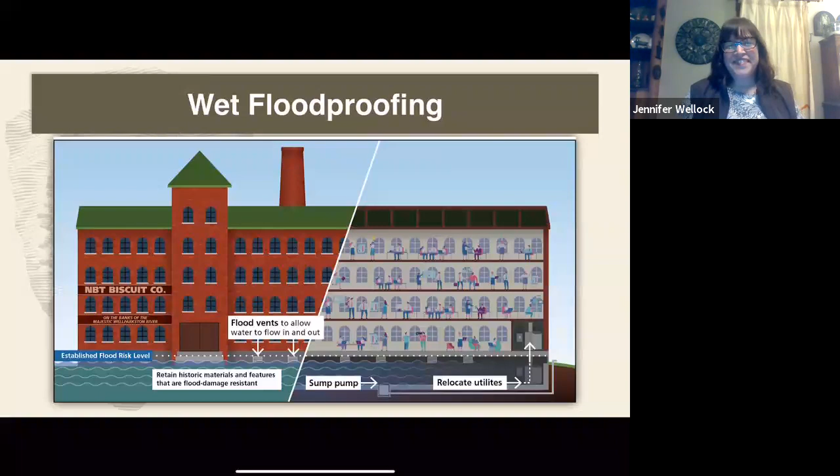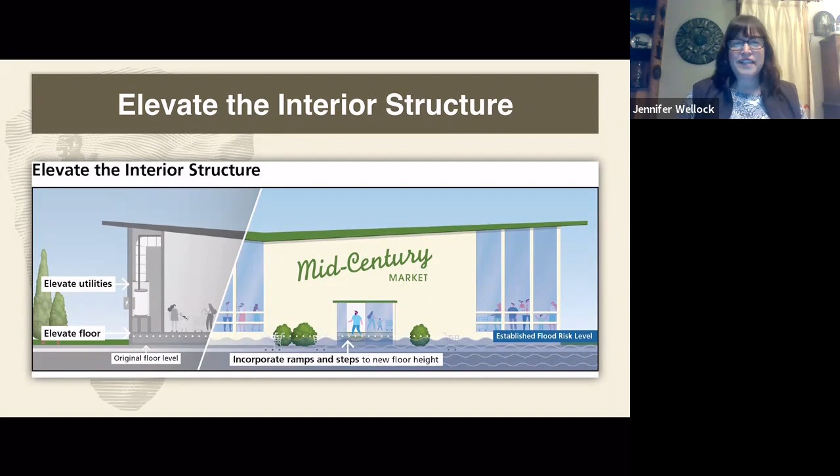The interior, this is my personal favorite. You get to keep a lot of the outside look. They used it in Fells Point, but it's definitely one that I think works for historic buildings as long as you have the interior height, floor to ceiling height. Next one.

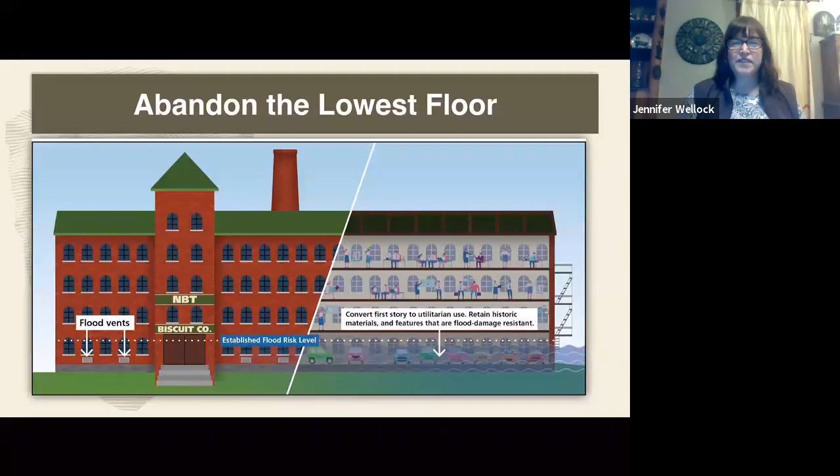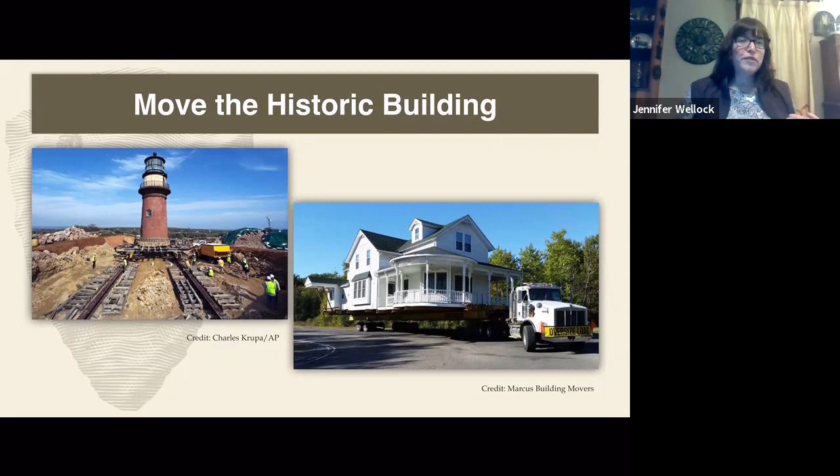Moving, the Park Service, we don't love a move. We don't enjoy a moved building because it requires, particularly if it's listed, you're going to have to work with the State Historic Preservation Office to make sure the new location is approved. When the building is off of its foundation, it isn't a building, it's actually cargo, so your homeowner's insurance doesn't work. You have to get cargo insurance. There's a lot of issues here. Plus the power lines, the permitting, you usually need police to help you get the building through, and you usually have to disassemble portions of it. So it is a bear. We just want to make sure you remember, get it out of the risk. Don't move it three feet and then you're still in a flood zone. Next up.

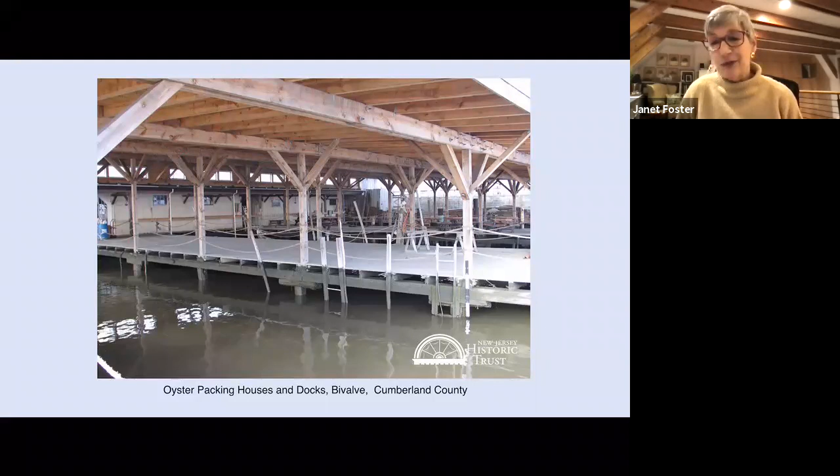Yes, there is a village in New Jersey known as Bivalve, and no surprise, it was the center of the oystering industry from the late 19th to the mid 20th century. Focusing on heritage tourism at Bivalve has helped keep buildings extant and a rich knowledge of the ecosystems of the bay alive. The Trust supports preservation efforts across a wide spectrum of activities to encourage heritage tourism. At Bivalve, the Trust helped fund the creation of interpretive panels, a short film explaining the planting and harvesting of oysters, and research and design of an interpretive exhibit on the Cashier, a surviving National Register listed oyster schooner.

Bivalve is part of the Trust's online Journey Through Jersey website that directs heritage tourists to sites around the state, searchable by location, historical period, and interest areas. Capital investment in buildings are only as good as the use a site gets, and so the Trust wants to encourage visitors to these historic sites.